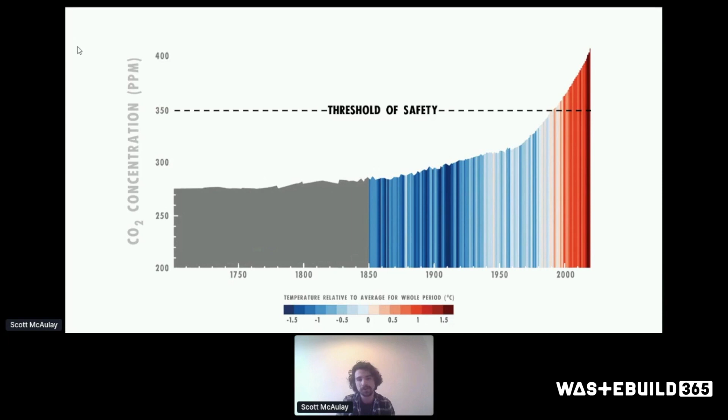We're at between 1.1 to 1.2-ish, depending on data set, temperature rise already. With that 1.5 degree threshold that the IPCC laid out in October 2018, we were told that the difference in impacts between 1.5 and 2 degrees of temperature rise were exponentially worse. But quite shockingly, this didn't come into my architectural education, and it wasn't really spoken about in practice a great deal. The conversation has thankfully moved along, thanks to people like Maria and Duncan kicking it, but it's taken a while to catch up.

We've got these different pathways, and achieving them does involve the built environment to an incredible degree. Business as usual is going to lead to at least 3 to 4 degrees of temperature rise. And seeing what's already happening at below 1.5, that's going to be exponentially worse.

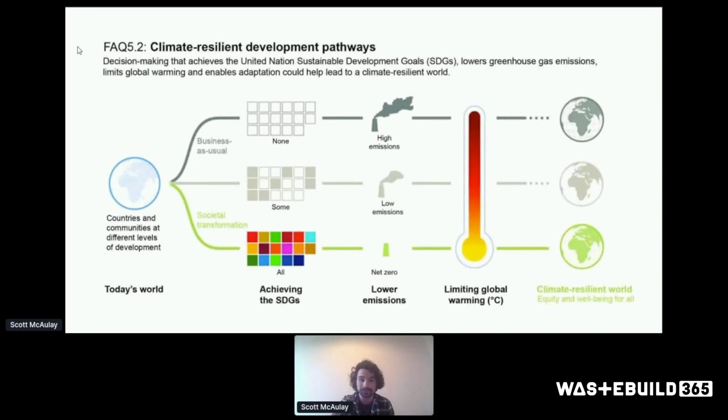The IPCC report actually specified what we need to do in construction. All pathways consistent with a below 1.5 degree temperature rise require that all building emissions be reduced by at least 80 to 90% by 2050. That's the least we need to do. Construction needs to be fossil fuel free and near zero energy by 2020 — that's right now. And there's a need for an increased rate of energy refurbishment to at least 5% per annum as well.

So we've been given the numbers, the IPCC has laid them out. The really important thing to remember is that 39% of all carbon emissions in the world at the moment are related to construction. 28% of them are operational energy and 11% are embodied carbon.

So everyone involved in architecture, design, construction has the ability to impact and reduce that 39% number. Other numbers to remember: 85% of buildings that shall be in use in 2050 are standing right now, and it saves about 55 to 75% of carbon emissions to retrofit a building instead of demolishing it. That's just some baseline figures.

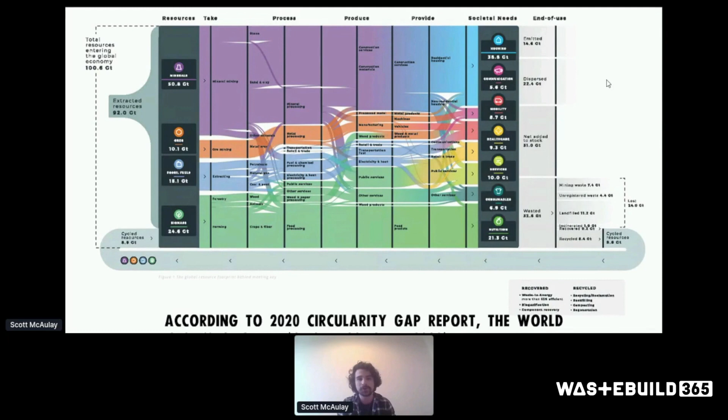On the topic of circularity, according to the most recent circularity gap report, the planet's economy is only 8.6% circular. So we've got this huge gap to start addressing. It's great where we are, but hopefully as this conversation becomes more mainstreamed into education and construction, that can be catalyzed to be a lot faster.

Another important part about the relationship between construction and the IPCC report is that we were given a planetary budget for a 67% chance of staying below 1.5 degrees of warming, and that was 420 gigatons in 2018. Very importantly, we emit at the moment between 52 to 55 gigatons every year, so unless we reduce that incredibly fast, we're going to overshoot within 8 years.

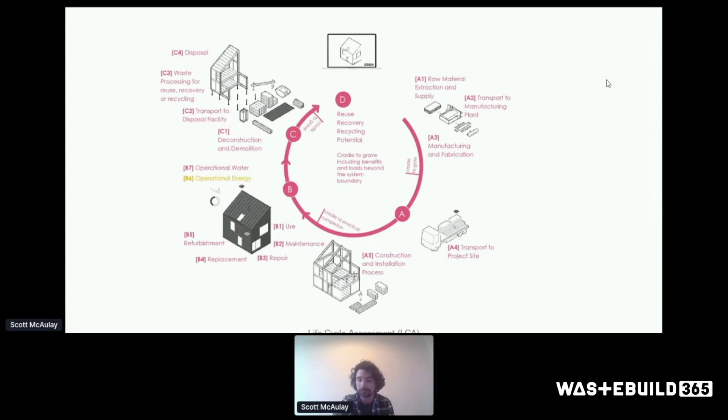This graphic by LETI beautifully illustrates all the points in a building's construction, use, maintenance, and deconstruction where carbon's emitted, because our typical life cycle, the long lifespan, has traditionally been seen as about 65 years, which in the case of a climate emergency is far too short for buildings to be doing. We need to push that as far as possible, have a capacity for transforming buildings and changing their use, not simply knocking them down when their use goes away.

The next bit of information is about that kind of injustice and looking at where we are in terms of the planetary conversation. If you look at the numbers, the global north is responsible for 92% of historical emissions, and the global south, who proportionally have the majority of the impacts, are only responsible for 8%. This was published last month in The Lancet.

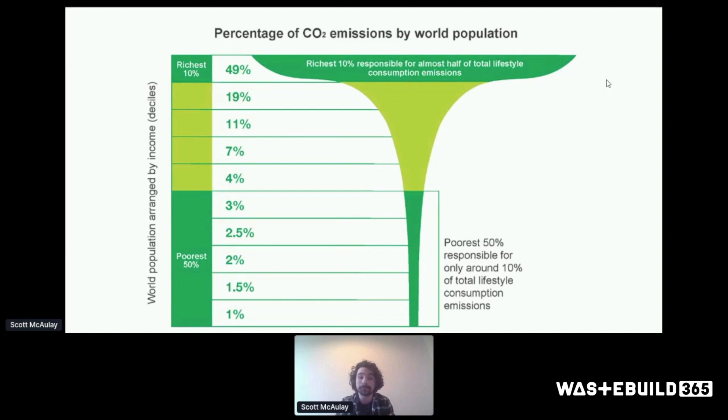When you start to look at emissions by world population, even though it's not all about carbon, the richest 10% of people on the planet are responsible for 49% of total lifestyle consumption emissions, and the poorest 50% are responsible for around 10%. And again, 100 companies are responsible for 70% of all greenhouse gas emissions since the 1980s.

As Naomi Klein summed up concisely in her last book, for the past three decades, since the IPCC was created, since the first report was published 30 years ago yesterday, the refusal to lower emissions has been accompanied with a full awareness of the dangers. This kind of recklessness would not be possible without institutional racism, even if that's only latent.

So we now know the economic arguments as well. Since 2006, we've known that climate change could have been curbed by about 1% of global GDP, but to leave it unchecked would be about 20% of the then damage. The recent report that came out this month was that it would cost 0.5% of global GDP to reach net zero by 2050. So the numbers are actually, we know what they are, we know what we're working with.

One huge problem is public awareness on what net zero means, what it means to get there, what has to change. A recent study in the UK showed that 64% of people surveyed had never heard of net zero before. So in construction, we've got this huge part to play in the conversation of making that public knowledge.

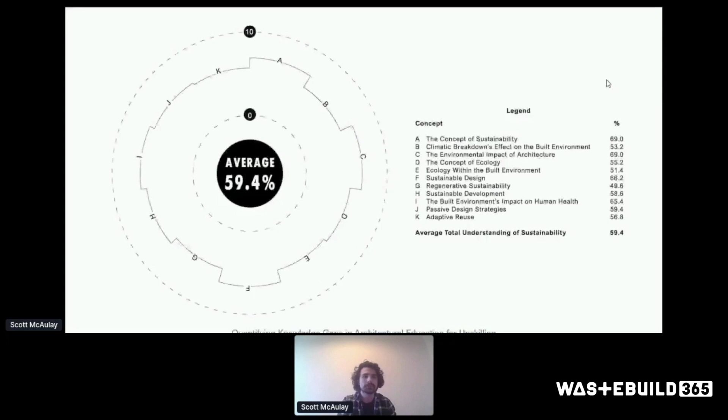This means recognizing that practitioners coming into the profession are feeling the mental and emotional side of climate change as much or more than you're feeling it yourself. So in workshops now I've taken to giving people space to share this, as it's something we haven't been doing before. In a workshop with landscape architects, I asked a room of 100 people who'd ever spoken about how they felt about climate change, and we got 6 hands very tentatively raised out of 100.

To hammer that point home one more time: 39% of all carbon emissions on the planet are to do with construction. So we've got this huge potential space to do incredibly good things in. If we can embed climate literacy into our conversations and how we engage with clients and institutions, we can affect more of a cultural shift in that direction.

So I'll wrap up because I think I've almost hit my time limit. One of my favorite quotes of all time is that the role of the artist is to make the revolution irresistible. Architects are not entirely artists, but our role is illustrating what the future could look like. So I'll leave on the pitch that the role of the architect is now to make decarbonisation irresistible—to paint a picture of the future that makes this something people really, really want, and entirely irresistible as well.

And I'll wrap up before I hit my time limit as well. So I think I'm done.

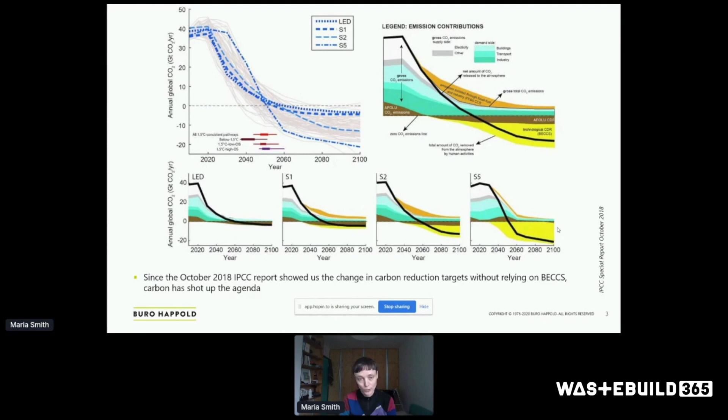And then over the roughly 20 years between the late 90s and the 2018 report, during which technologies like BECCS were explored in more detail, it became clear that dream, that hope, wasn't going to come forward at anywhere near the scale and speed we had previously expected. So suddenly we had to remodel everything without that level of capture and sequestration, and actually look really hard at the cuts we needed to make.

One of the key reasons we didn't make that decision earlier, and the reason we were so seduced by carbon capture technologies, is that we—I'm talking about the big collective we here—were looking at the close correlation between material footprint, carbon dioxide emissions, and global GDP.

We were very scared that if we try to make sudden cuts to carbon dioxide emissions, that's going to have a huge economic impact. There's always this trade-off being talked about, and we hear it every second sentence at the moment in terms of dealing with COVID, that the economy mustn't be harmed in any way. The close relationship between carbon dioxide emissions and the economy meant we were ready to believe this technology can help us maintain the economic status quo. And the fact that we were so allured by that technology has now put us in dire straits.

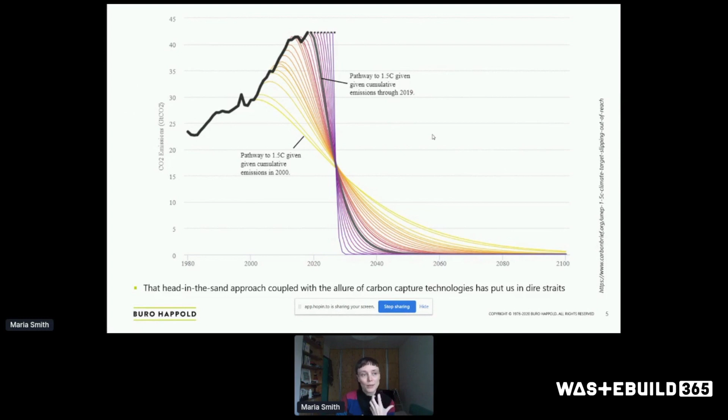I'm sure everybody's already seen this graph, but it bears repeating to look at how much more gentle the transition could have been if we'd started sooner. I say this not to depress us all, but to remember that we need to be looking ahead, and we need to not make the same mistake with biodiversity collapse as we made with carbon.

I'm so pleased that the awareness and projects like Scott's are really changing the level of literacy around carbon at the moment, but we also have to talk about biodiversity and ecosystems as well, because they are critical and in critical condition.

We are deeply, deeply reliant on ecosystem services, which is a horrible way to put it, but it says something from that human-centric point of view. The reality is that we're living in a very networked ecosystem, and human health is bound up in all of these other systems being successful and working. We don't even fully understand the way that if we fiddle with something over there, how it's going to affect these systems. So it's really important that we appreciate there is a complex ecosystem that we're part of, that we have to not mess up.

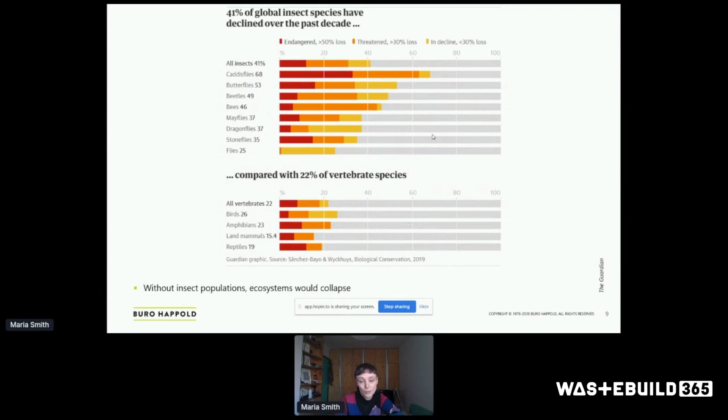The point I'm trying to make is that we have to not stick our head in the sand about this stuff as we have about carbon. This is true for us in the built environment as well, and I would like to make sure that as we talk more about carbon, we are talking about the other impacts that the built environment is making alongside all of these things.

I've made a quick list, but I think the first most important thing is that we don't understand this as the built environment versus the natural environment, with the best thing we can do for nature being to put a big keep-out sign on it and make sure the built environment stays over there, leaving some nature left for nature.

I think that's a flawed understanding, and it also lacks imagination. It lacks us being able to envisage a future where we can have a positive and reciprocal relationship between humans and the rest of nature. That's a really important starting point, that we're part of this ecosystem, and we need to respectfully and carefully lock into these cycles, not think of ourselves as separate, or that the best thing to do is to be separated.

So this is just a list of slides that I'm going through quickly because of time limits, about the ways in which the built environment and our professions encroach on and damage ecosystems.

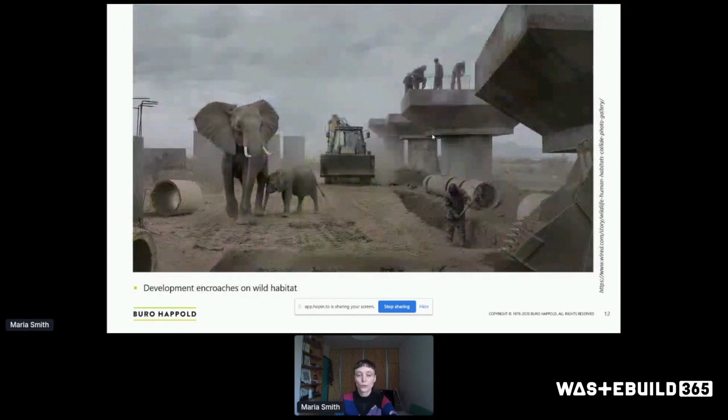There's a first list of the more direct ones. We obviously encroach on wild habitat, quite literally curtailing habitats that wild animals live on. This is true in a very shocking sense, but it's also true in lots of little ways, such as when we redevelop even brownfield sites, causing immediate species loss, biodiversity loss, and habitat loss in a direct, obvious way.

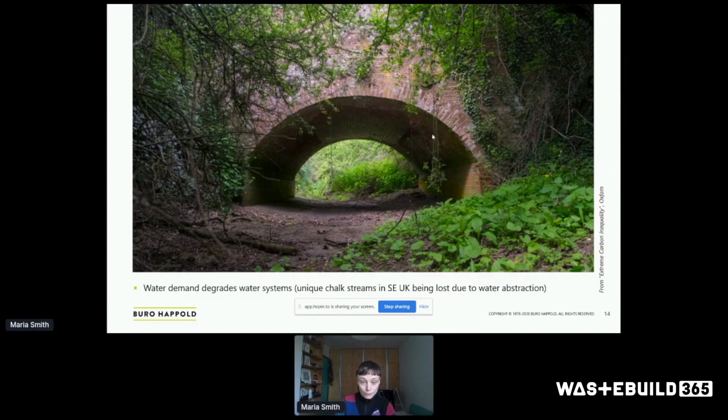We degrade water systems through creating unsustainable water demand in locations that can't service it. There's a really sad series of streams completely unique in the south-east UK and northern France—habitats unique in the world—that are being dried out and lost forever because of water demand, for example.

And there's obviously water pollution—a very clear one, that we cause water pollution and air pollution through our built environment activities. There's also the heat island effect that we all feel as those of us living in cities, but it's going to be so much more keenly felt as temperatures continue to rise.

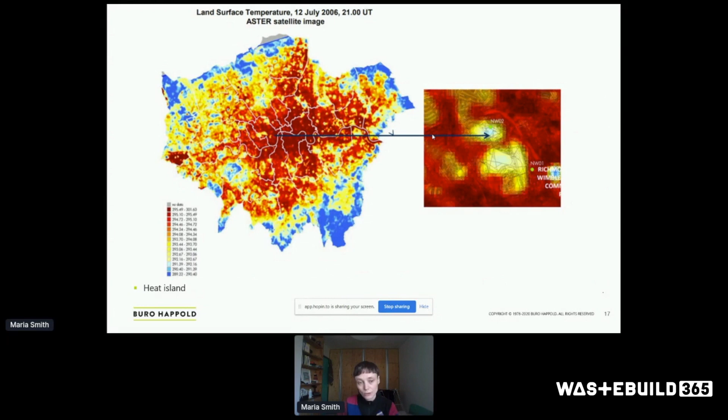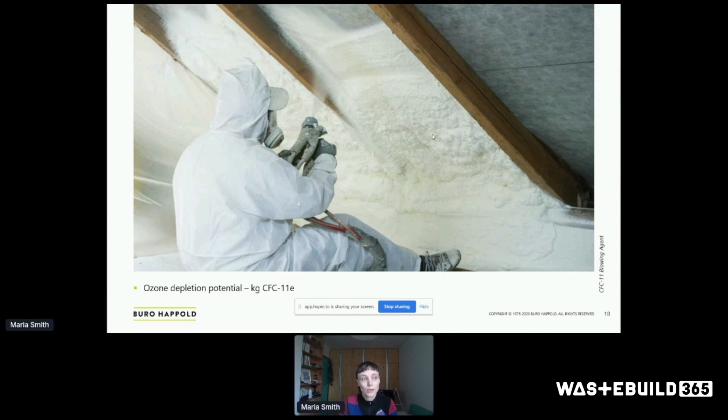On top of those more immediate effects that happen almost within the site boundary, there are also effects we're causing elsewhere—similar to how embodied carbon comes from demand created within the site boundary. Things like ozone depletion—we have to not forget about this. We felt like we did a lot about it in the 80s and 90s, but it's still a problem, especially when dealing with waste building materials and waste white goods.

Acidification—of acid rain, air, water, and soil. This is still a huge issue, often associated more with other industrial processes, but things like steel are a significant contributor through nitrogen oxides and sulfur dioxide emitted into the air, causing direct forest dieback and so on. So we in the built environment industry are contributing to this as well.

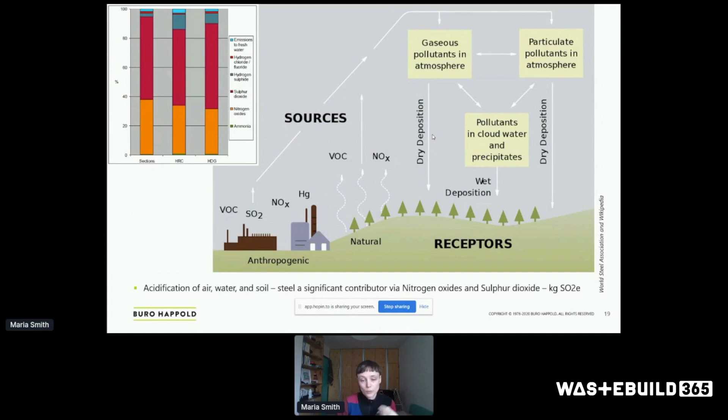Another water one is eutrophication—excess nutrients triggering rapid algae growth that disrupts ecosystems. The sun isn't able to get beyond the algae into deeper waters, creating deoxygenated dead zones, and the algae can become toxic, causing red tides and so on.

This is more associated with unsustainable agriculture, intensive farming, and fertilizer runoff, but products like concrete manufacture also directly contribute to eutrophication. So again, we in the built environment are causing these kinds of problems.

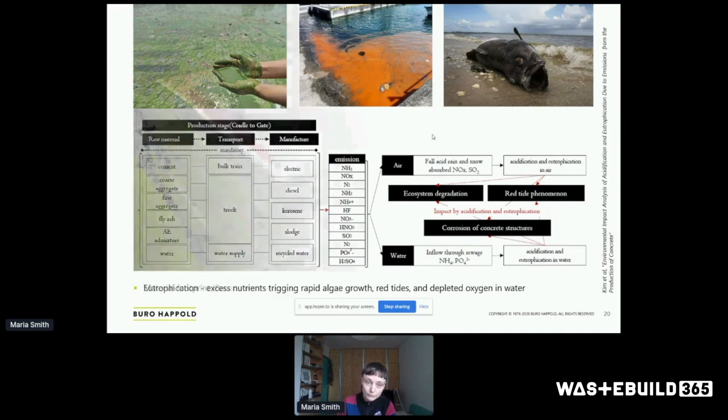Then there's our material footprint—something Duncan talks about a lot in terms of moving towards a circular economy and reducing our overall material footprint. It's not enough to reduce the embodied carbon of our materials; we have to reduce the actual use of these materials. It's not just about avoiding waste, but avoiding extraction in the first place, because if we continue creating demand for more and more materials, the effects on the landscape are really severe.

This is one of many examples showing that kind of direct scarring. This is red mud, a very alkaline byproduct of the aluminium industry that has to be kept separate from our other ecosystems. But there are problems and leaks, and ways this isn't always handled super well—a striking example of how extractive architecture affects the landscape.

So there are many different problems, all interconnected in the way the ecosystem is interconnected. We need to take a systems approach to untangle this and fit ourselves and our habitat creation into these systems. This is a crude diagram I've drawn, just trying to tie together some of what we're talking about.

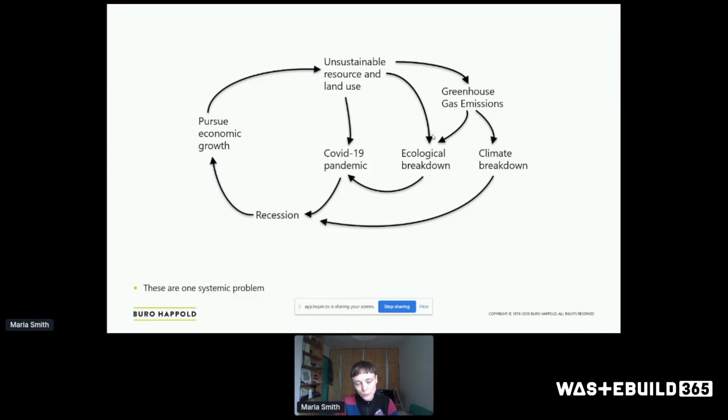So I think we're all quite familiar now, and we agree that it is unsustainable resource use and land use that is causing greenhouse gas emissions, that is causing climate breakdown and ecological breakdown. This is something that is happening. Thankfully, at least, a lot of climate denialism has been refuted now, and the misinformation is much less. It's still some of a problem, but by and large we are now living in a world where this is acknowledged. So this is good.

The COVID-19 pandemic is part of this, and I think at the beginning of the pandemic that was maybe something that was a little bit more fringe, but there have been lots of studies and articles reporting on this now.

It's really important, I think, to understand that the pandemic is not a competing interest for climate breakdown or ecological breakdown, because it is part of it. It's part of the same human-made, unsustainable behaviours and activities that have put pressures on our ecosystems to cause that.

So just to be really clear about how that happens: our demand for resources has caused and incentivized the invasion of wild landscapes. This has degraded ecosystems and caused habitat loss. This habitat loss means species are forced into smaller spaces, forced into new interactions that they haven't necessarily been used to, and this creates a literally breeding ground, a really ripe environment for pathogens to jump from species to species, including humans.

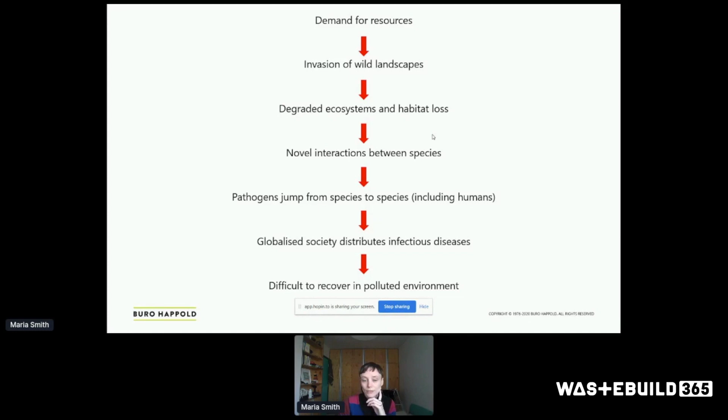And of course, our globalized society has distributed infectious diseases very well, and the real kicker in a way is that it's really difficult to recover in this polluted environment. So I think it's really important that we recognize the pandemic as one of these things.

And while that's sort of terrifying in some ways, maybe there can be a positive of this, that it can maybe incite some action, incite some change. We've seen so much that change is possible. We've seen communities fight back, but we've also seen incredible health inequalities laid bare by this pandemic. So I think it's a really difficult thing to talk about, but I think it's important that we bring it into this conversation when we're talking about ecological breakdown.

And we see already immediately, the pandemic is causing a recession, and as Scott also mentioned, the climate and ecological crises also cause economic harm and cause recession, and the longer that we leave it, the greater that harm is.

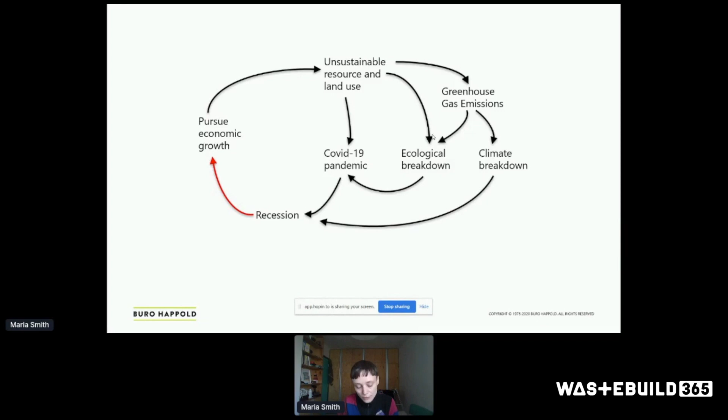But this is where things start to become a little bit problematic, because then we end up in this position of economic instability, of recession, of those kinds of economic problems. And so we try to grow our way out of it, to pursue that economic growth in order to rebuild, build back better, and all of those kinds of slogans that we hear.

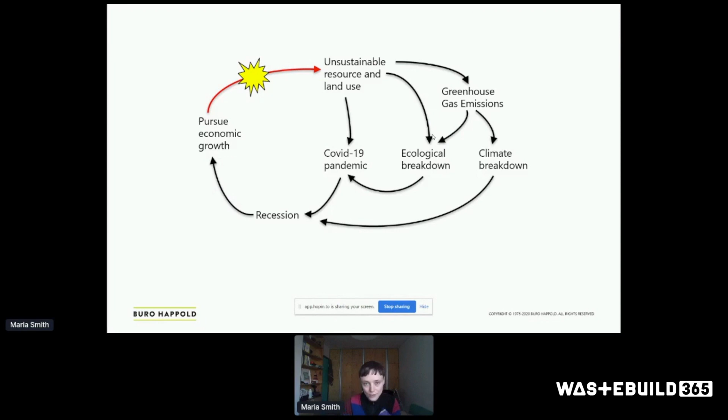And what I kind of want to scream into my pillow about at night is that by doing that, all we're doing is redoubling down on exactly the same negative... it's a positive feedback loop, but it's a negative thing that is causing these problems again. We have to appreciate that if we just try to grow ourselves out of this problem, all we're doing is further incentivizing this unsustainable resource use and land use, and we're just doubling down on this problem. So we have to look at this.

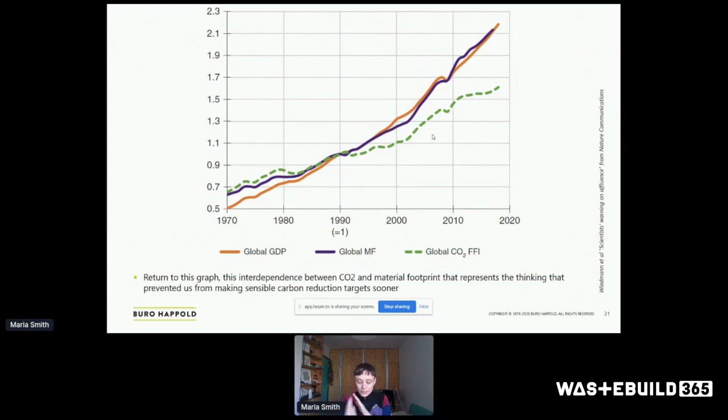So I just want to dig into this a little bit right now. As I'm saying, the pursuit of economic growth is driving this ecological damage. So going back to that slide from the beginning, we can see that previously the argument was these things are really closely linked together, so we can't suddenly reduce our carbon dioxide emissions because we're going to harm the economy. And yet now we're saying it's a problem that these things are really, really linked together, because we want to be able to grow ourselves out of this recession and so on.

So let's try to reverse this arrow by saying we don't actually have to have these things linked together. Now, this is just a sort of wish. There is no actual plan as to how we can do this, and no evidence that this is in fact possible. In fact, this has been used very strongly the other way around, as evidence that we can't suddenly make changes because economic damage will happen.

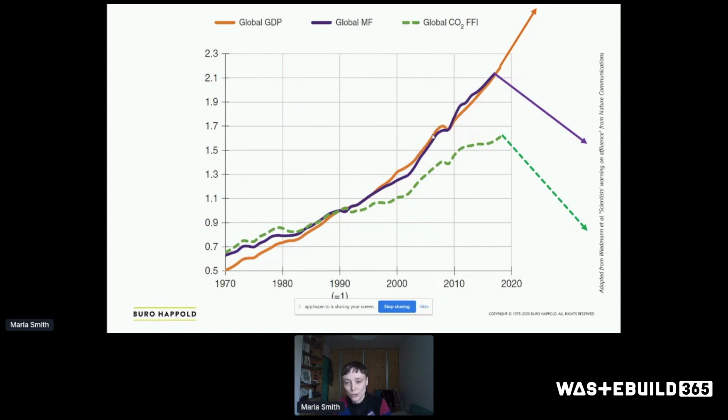The economy is not dematerializing, it's rematerializing. Even though over the last decades, whether you take a specific country or the whole global economy, the amount that has become tertiary sector, services, or weightless - like the internet - gives the impression that perhaps this is happening. It's not. Our material footprint has continued to grow despite that.

But still there's this idea like, oh, it's going to be fine, technology is going to come along. This is the exact same problem as we were talking about with carbon capture and sequestration - this idea that technology is going to save us.

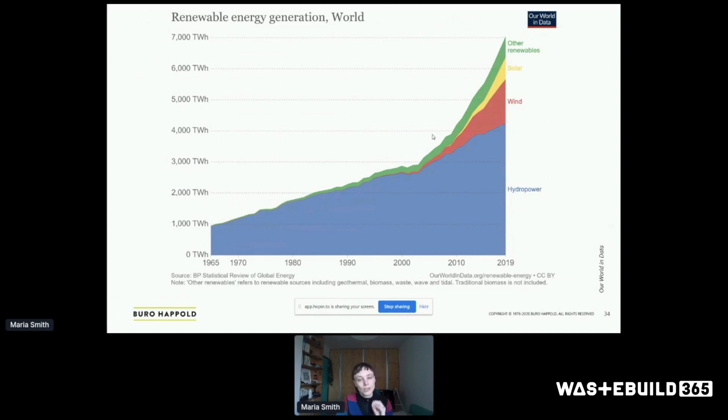But the problem is, if we continue to pursue that economic growth, the overall energy use - total energy use and production from all sources - is also going up massively. And the goal we're currently setting for renewable energy production is not only to meet our current energy needs, but actually to grow at such a supreme pace.

Just to make the point as to how big a jump this has to make, these are those two graphs at the same scale. It's tiny. Our renewable energy budget at the moment is about 5% of our total energy use - about the same amount of energy we globally had in 1850.

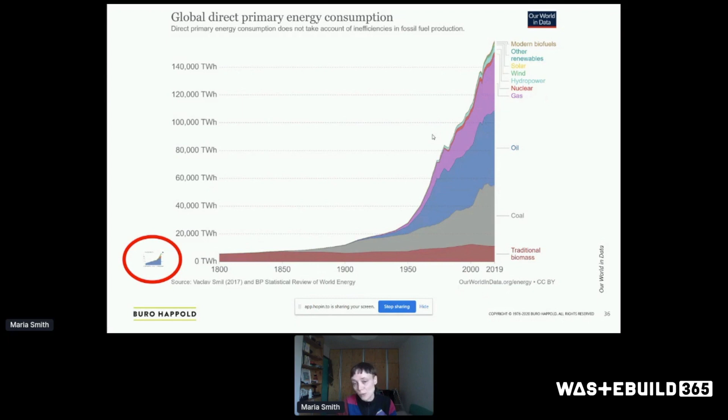If we're going to make 100% of the energy we use renewable, which is what we need to do, we need not only to massively scale up renewable energy use, we need to use less energy. We need to meet in the middle - we can't just expect that energy use to go up. That means we have to stop growing the economy and stop requiring more materials, more energy, more production, more everything. We can't just have more. This is the point.

At the moment there's this idea that it's fine that we keep making things worse, because at some point we're going to reach a tipping point and suddenly start to make things better. There's just no evidence that that is possible.

It's just mad. The evidence you'll sometimes see, like from UK government data, showing that we are starting to improve things - all that's doing is fiddling the books. It's just taking off our impacts because we've moved a lot of our industry offshore, taking all of that off the books. That's the only way they can make it stack up like that.

If you actually look at what we consume, this is why I'm so excited about the way we're talking about embodied carbon, and why I'd like us to talk about embodied everything else - embodied water, embodied energy, embodied materials, material footprint, embodied noise, embodied social value - because that way of thinking about embodied impacts means we can't just take our impacts off the books if they don't happen within our boundaries, and we continue to take responsibility for that.

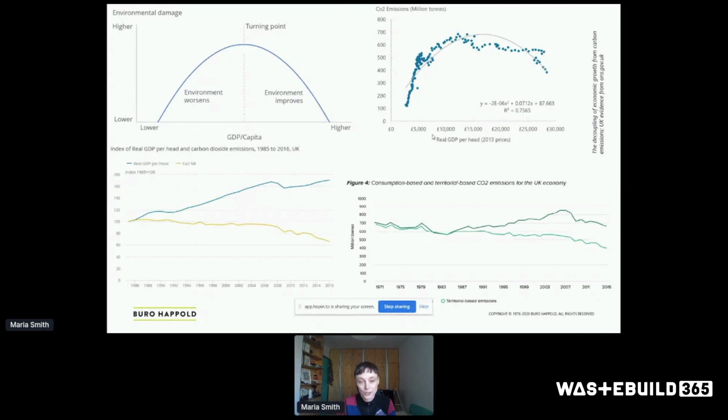So that's really good. But the point is, we can't keep increasing energy demand and resource use. We have to acknowledge that growth is driving this, and instead we need to find an alternative way to equitably distribute our scarce resources and find alternative economic systems.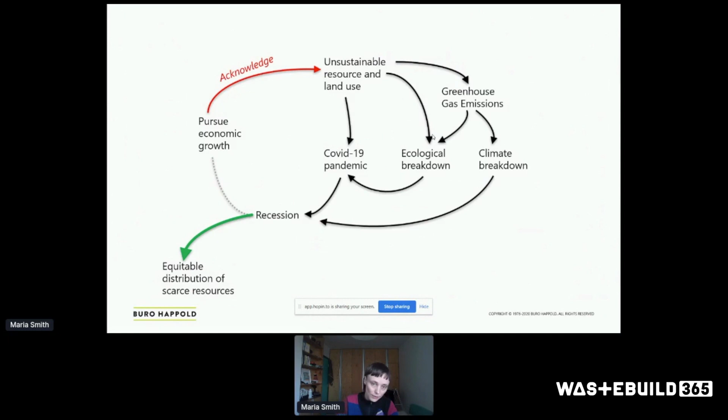I'm just going to flash some up for you to Google later in case you're not familiar with them, but there are new economic systems and ideas coming out, things like sovereign money, which takes the power to create money away from banks and gives it to democratically elected bodies such as governments, so they can create money and control the economy more closely.

There's also modern monetary theory, which understands tax not as something needed to fund public spending - that's a fallacy - but rather that taxes are about controlling inflation and the distribution of resources. If money is a construct, then money can be used in a much more careful way.

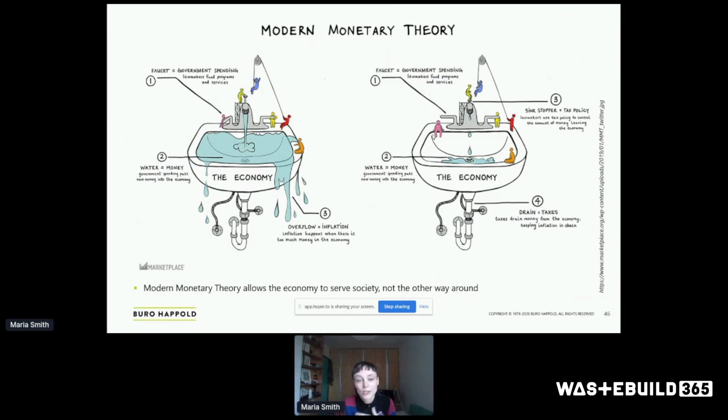These kinds of economic theories allow us to escape the dependency on ever increasing growth, which means we can actually tackle our environmental problems. Lots of corporate reform ideas are connected to this as well.

So if sovereign money and modern monetary theory are about how governments could think differently, there are also different ideas around how corporations can think differently. For example, certified B Corps, where you consider not only your shareholders and profits, but also other stakeholders, such as your workers, the community you impact, and the environment.

There are policies such as rent controls or limits on advertising. I think we will look back on some of the advertising we see now, and it will be as shocking as things we look at today, when we talk about the incredibly environmentally damaging and high carbon goods that are still being advertised and driven forward now.

Then there's lots of fantastic things to do with universal basic income, care incomes, and training incomes, that can help, in concert with these other economic policies and changes centrally, to support us and equitably distribute resources.

This kind of stuff will allow us to actually reduce working hours, scale down our harmful industries, and reduce our energy use. We'll be able to do this if we start having these kinds of economic policies, rather than staying under the current growth paradigm where we need to keep growing in order to solve other problems, like not tackling inequality head on.

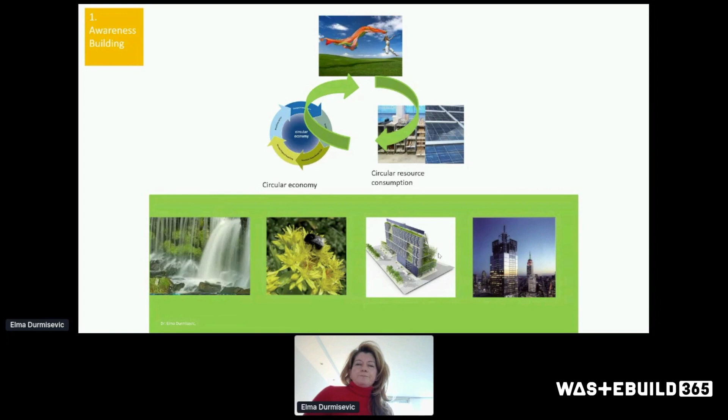But there's still a lot of work to do, especially when looking at construction. The question is, where are we now with the construction and design of our buildings? How far are we from the ambition of eliminating waste in construction and creating buildings and built environments that merge with the natural environment, providing positive rather than negative impacts on the natural habitat we have as people on this planet?

Looking at the construction industry, buildings are built in a way that when we want to change something, the only way we can do it is by demolishing. They are demolished all the time, mainly due to degradation of materials, new technologies, better isolation standards, inability to accommodate different user needs, no transformation capacity in the buildings we design, and inability to exchange building components and materials.

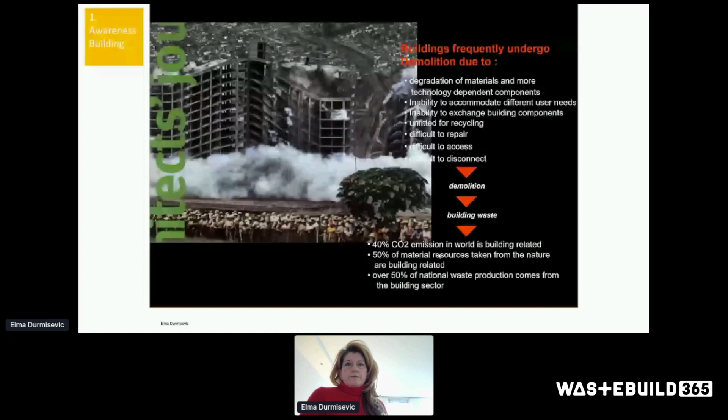The fact we deal with today is that the construction industry worldwide is one of the key industries that will play an important role in fighting climate change and our path toward a circular economy, despite its very negative impacts: 40% of CO2 emissions related to this industry, 50% of material resources going into it, and 50% of national waste production related to it. So this is the environment we are dealing with.

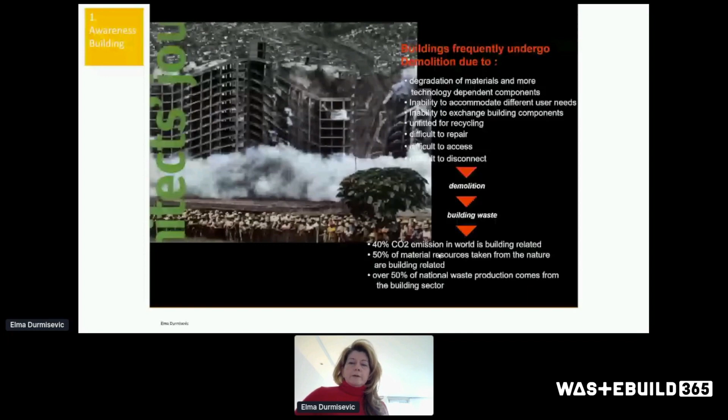As I mentioned, as a designer and a scientist, I'm trying to understand where things go wrong and how we can fix it.

This is my last slide on the awareness building story, but it presents very much our attitude to construction and how we value construction. We see this kind of demolition scene in our cities all the time.

I live in Amsterdam, and this is a project I followed because it's nearby: the Fortis Bank in the city center, which was 16 years old, with a granite facade like the one you can still see on the Cheops Pyramid in Cairo, which has stood for 3,000 years. This building was crushed into pieces after 16 years and became maybe part of the sub-construction for a road.

in the Netherlands. So a building which was there in the city center lost its use value and material value within 16 years and gave way to new construction, which has been built in the same way and probably will be demolished too, if you look at the trends from 25 years ago.

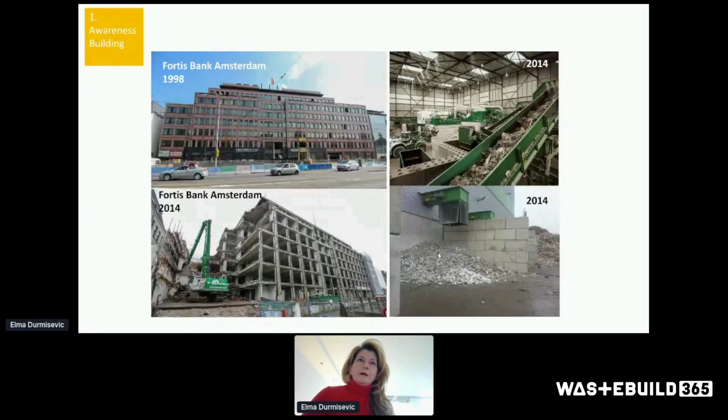The problem I see in construction and design is that we perceive buildings as static products, static structures which do not change, while the core question that architecture and building has to answer is to provide shelter to human activities and human life. And that core need, the human activities and life, is very dynamic. So obviously there is a fundamental fault in the way we approach design and construction in general, building kinds of pyramids around something which changes so often.

This slide indicates how dynamic our own lives are. We go through 7 phases in our life, and every phase requires something else from our built environment. In the Netherlands, people move almost every 7 years from one house to another because the house itself cannot accommodate the requirements of the next life cycle.

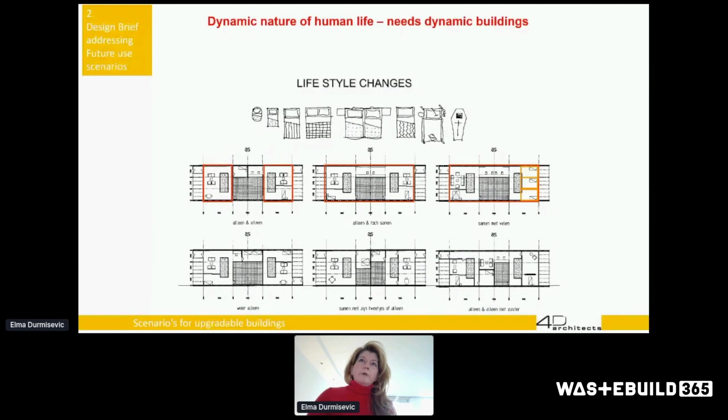That's the kind of crash that happens when we look at the buildings we inherited, that we built and even design today, which are not built to be adapted, transformed, or upgraded to something else. Their parts are not designed to be recovered, updated, or upgraded with new technologies and brought back into these buildings. We know only one thing: we design buildings for only one end of life, and that's demolition, which creates huge negative effects on the built environment in general.

So the future, as I see it, and all the tools and protocols I've developed so far, also within European projects, is developing new transformable buildings, an upgradable built environment which does not recognize demolition as a process at all, but reconfiguration, reconstruction, transformation, and so forth, so that a building can live, change, and adapt through its whole life cycle without being demolished, but upgraded.

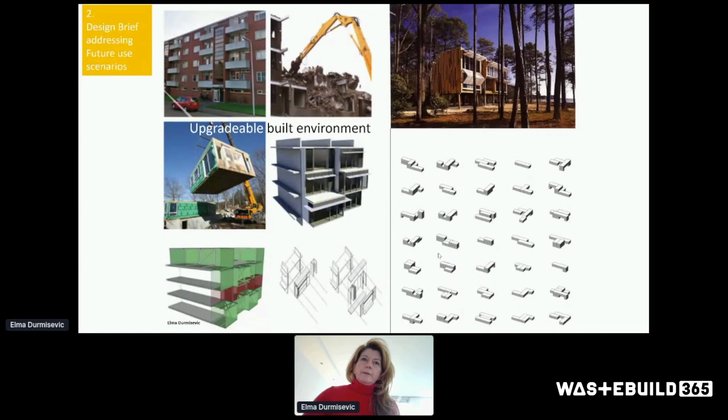So where do we start if we want to approach the building in the future in such a way? If you want to design buildings which will not end in 20 years because they cannot be adapted to new user requirements, and therefore need to be demolished...

We start with understanding the question properly, and having a good discussion with the owners of future buildings. This is a project I'm showing here, done with the Housing Corporation Woonplaats in Enschede, in the eastern part of the Netherlands, which wanted to build a few housing blocks in one of the neighborhoods in Enschede.

My question at that point, as we had already raised the issue of problems with existing buildings, demolition, and all its negative effects, was to ask them to think twice before presenting their design brief and their user requirements for their houses.

I asked them also to study the demographic changes over the following 50 years and the developments of the city and neighborhood, and based on that, to sketch 4 to 5 user profiles they expect to have in these buildings over the coming 50 years. Surprisingly, the Housing Corporation took it seriously and came up with 5...

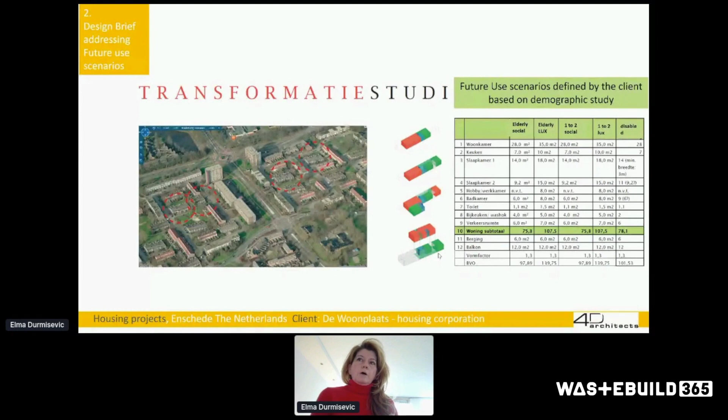of the city itself. This was input to develop a system, to design a system able to accommodate these changes from one use to another, or to a fifth, without demolishing, but allowing the block to live together with its users and future users, and to accommodate their future needs without being demolished. Already in this project, the ideas of understanding the transformation capacity of a building design, what it offers and can offer for future users, came to the table.

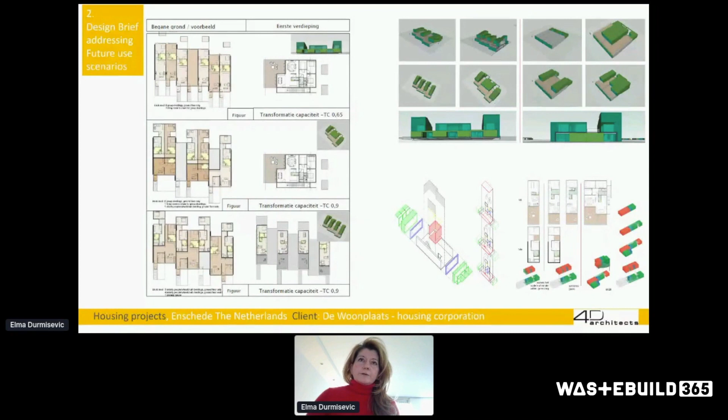A model which I developed later, also within the BAMB project, is the transformation capacity tool, which addresses this issue. I will talk about that a little bit later.

The other important thing, besides understanding future users, potential users, and user requirements, is trying not to design buildings for one use, but for multiple uses, which requires more action and responsibility from the owners of the buildings themselves.

The other one is technical requirements. Sometimes we deal with new regulations like better isolation, better materials, and so forth, and that can be a reason why we demolish buildings. So why not design building component systems and parts which are upgradable on the level of module systems and components, so that you can upgrade and reconfigure your system?

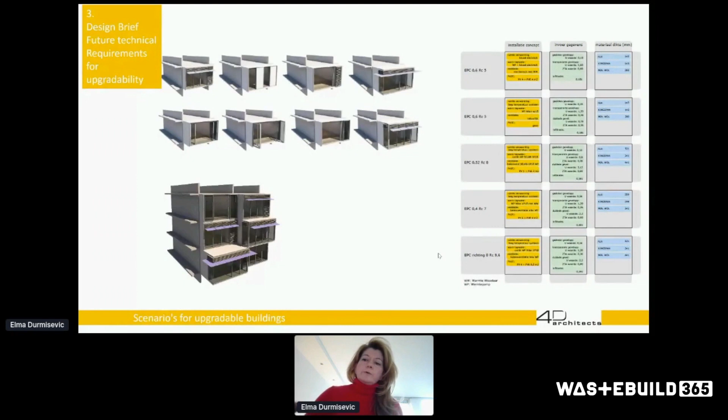This is a development we've done with a consortium of industry partners in the Netherlands, where the Housing Corporation was also involved, where you can have a variation of energy performance requirements built into the module itself, and the module can be adapted depending on its orientation - is it south or north, do you need solar panels or not, more open glass or not, or even bigger spaces. If additional changes are needed on such a module, it's brought back to the factory, the reconfiguration takes place, and the module goes back with new functionalities. That's the upgrading part of it.

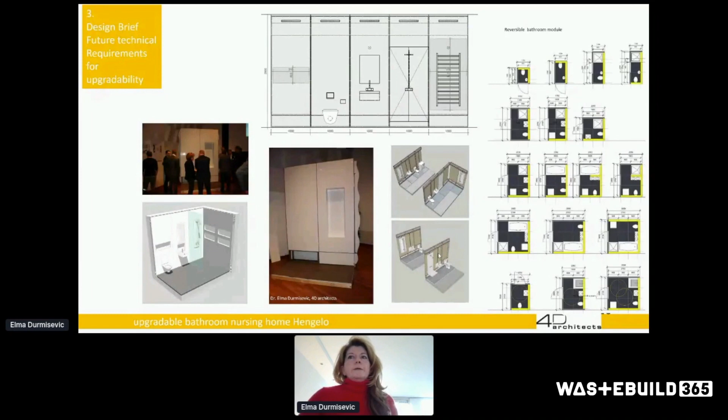I'm just showing a few other systems we've been developing with different consortiums, always with industry and one of the potential owners - in this case, the nursing home in Hengelo. This involves understanding potential patient profiles, for example in nursing homes, or the potential of transforming the nursing home into a housing typology with bathrooms, designing a bathroom system around that so it can be transformed and upgraded without being demolished.

So those are three points which I've found important over the last 10-20 years when working on building design and talking with owners and clients, but also with industry, trying to understand how we make this shift towards another way of building, another perception of what building performance is, moving away from static to dynamic structures and systems.

At this moment, we have the final code on thermal regulation, which is the zero energy building. That means this whole process, which began after the oil crisis in 1973 when building regulation focused heavily on energy, is now more or less ending and moving into the next phase, which will deal with circularity of resources and materials in a building.

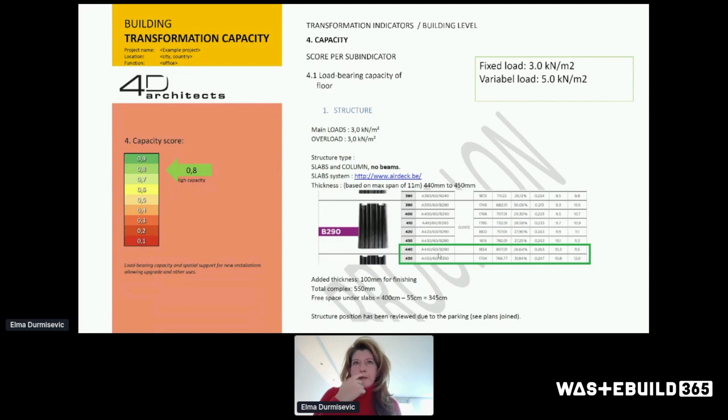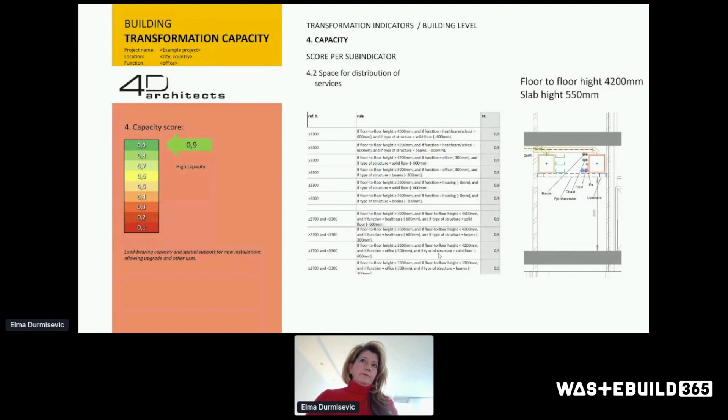That's one of the straightforward things that can extend the use options of buildings, along with the brutto floor-to-floor height - these are indicators coming from the transformation capacity tool, which I'll show in the next slides. If floor-to-ceiling height is at a minimum, like 260 now in the Netherlands for housing, and everyone sticks to that minimum, transforming it into something else that needs more installation services will cause a problem. So there are a number of issues we've recognized that can extend a building's future use if we account for them at the beginning of the design phase.

Many of these indicators I did integrate into a transformation capacity tool, which assesses the ability of a building to transform from one function to another, taking into account spatial indicators of the building, blocks and spaces, and the technical capacities within the building.

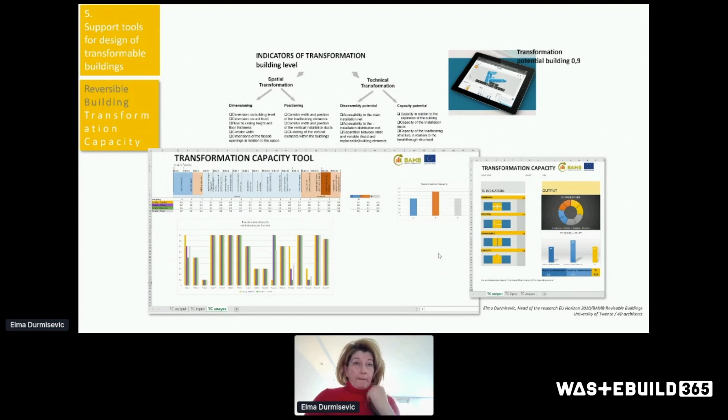This tool is also developed as part of Revit, a plugin for Revit. So designers using Revit in early design phases get direct feedback through the different design stages on the transformation capacity score, and can improve it through the design process.

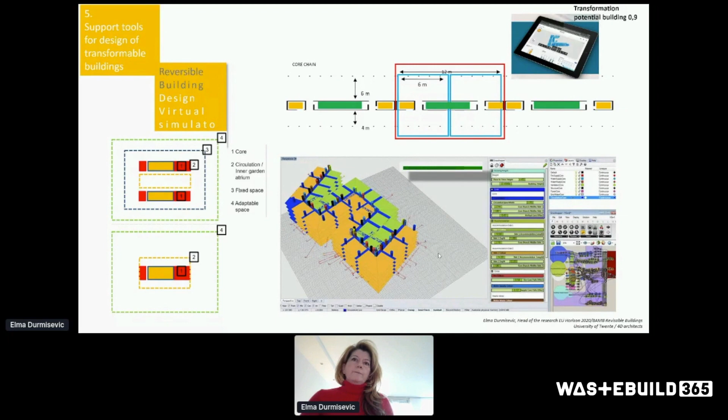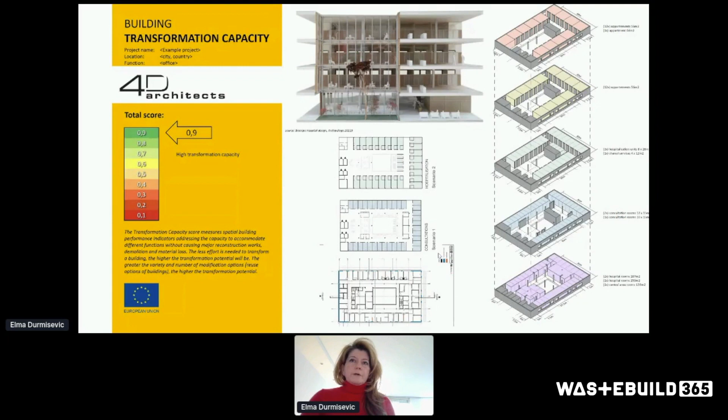Not many designers do that at the moment, which is why this tool is now being used - for example, in the new design of a new hospital in Brussels. It was used to test design solutions after two design phases, the preliminary design phase and the definitive design phase, and after these sessions and improvements with the design and engineering team of the hospital building, they increased a few aspects, resulting in an increased transformation capacity index.

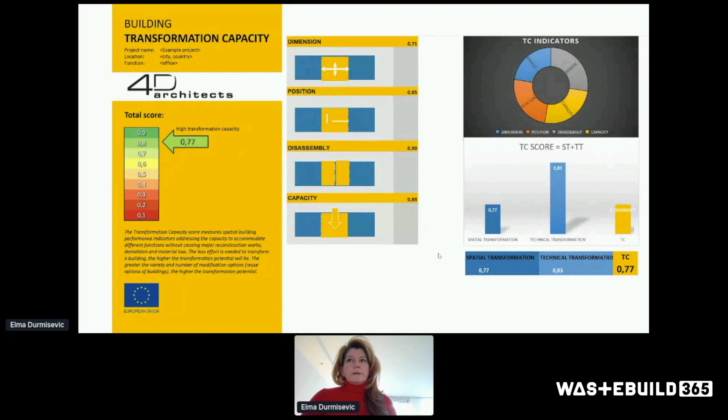That meant a score of 0.77, meaning the hospital can be transformed by partial demolition, which would not include more than 10% demolition of the structure. So these kinds of tools help us in a design process understand the impact of our design solutions on the future use and potential transformation of buildings.

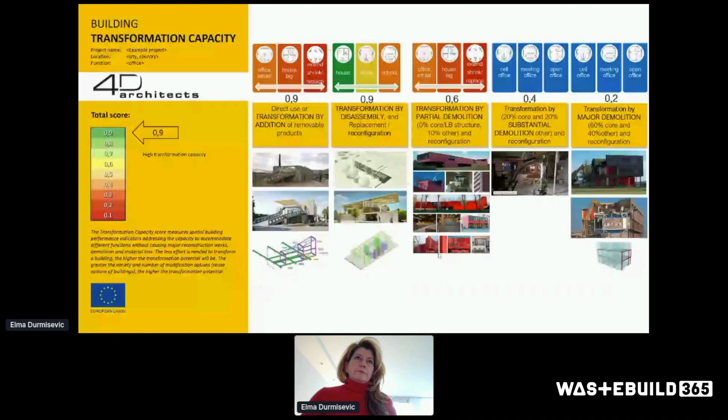Another tool I've been working on supports construction companies trying to understand how to deconstruct existing buildings in the best way and recover materials for their highest value. For that, I developed a reuse potential tool, which has been formalized within the BAMB project.

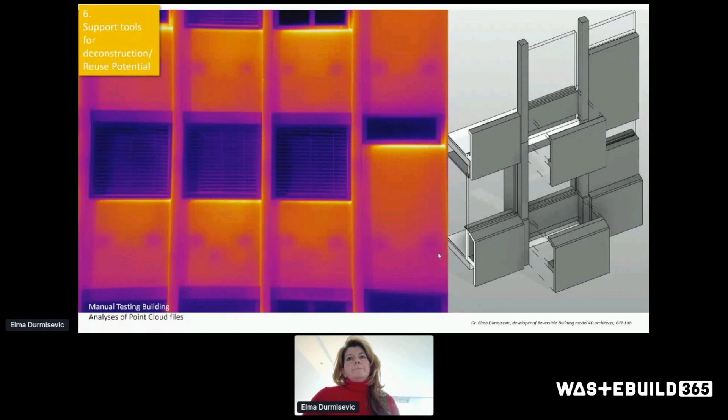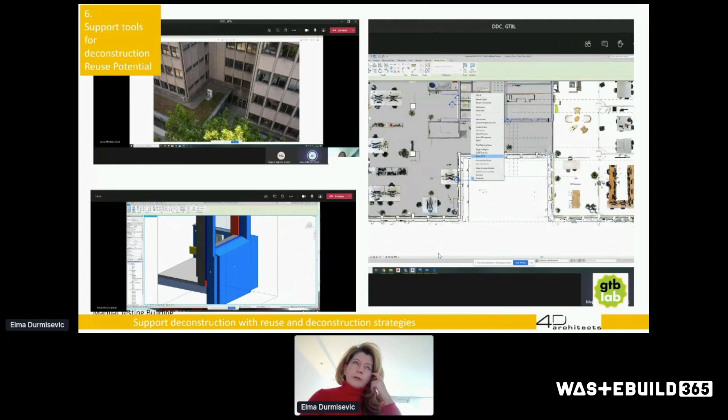Now we are integrating that tool with digitalization - we have scanned a municipality building in the Netherlands, a 10-floor high building, with infrared scans and normal scans from inside and outside, creating a basic reversible BIM, which then uses the transformation reuse potential tool to measure how easy it is to recover an element from the building without damaging the element itself or surrounding elements.

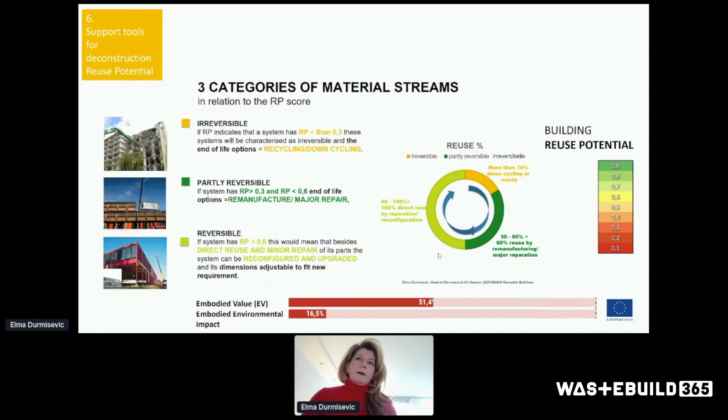That assessment is done manually on a building level, on a system level - how easy it is to take a facade system or part of the facade system out - and on a component level.

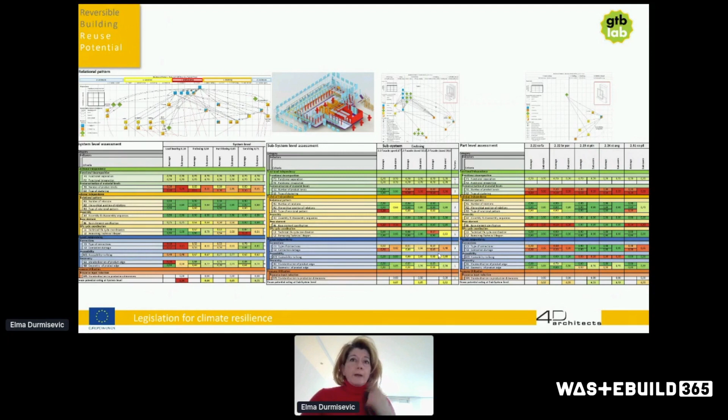These evaluations take some time, so we've integrated it with BIM, which helps us automatically create a color coding system in Revit with a plugin, indicating elements that at this stage have up to 3 relations as green, up to 7 as yellow, more than 7 as red. That's a first indication of how easy it is to take something out, and connections and other indicators from the reuse potential tool are now being integrated into that.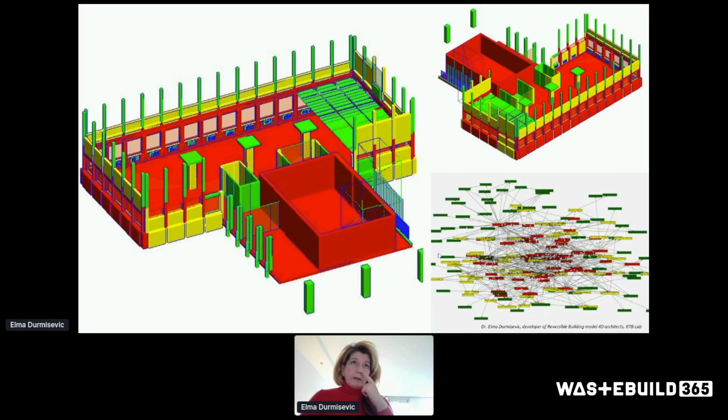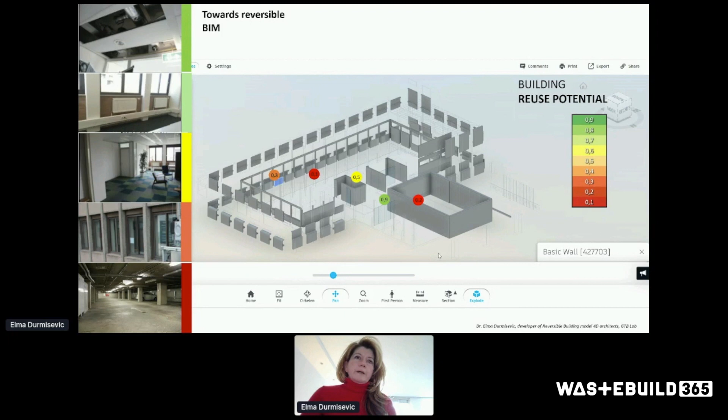This information helps construction companies understand better how to organize the construction strategy, and also what the reuse options of materials in a building are, which again helps owners of the building understand whether there is additional value that can be taken out of the existing building.

Finally, as a 7th point, I want to point out that knowledge sharing is important, and therefore we are now developing with the Ministry of Internal Affairs in the Netherlands a knowledge bank for circular buildings, where we will put in the information we came across and developed within different European projects on guidelines and protocols, measuring circularity, and number of tools.

We will also integrate realized projects and pilots in Europe, and there is an ongoing transformation lab, the GTB lab, Laboratory for Green Transformable Building, which is being transformed once a year, and all results from these transformations will be put into that knowledge bank as well.

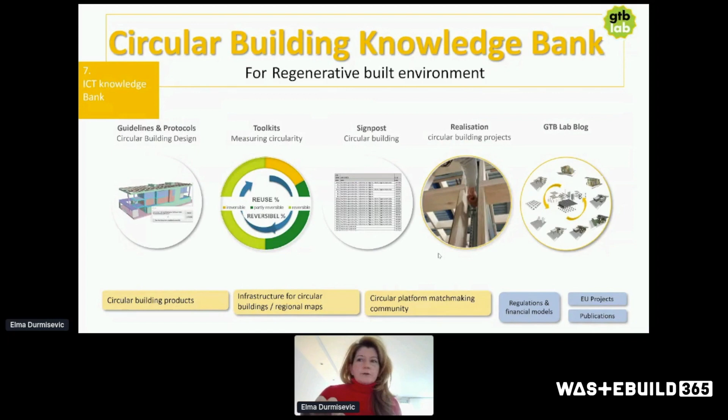So I hope I stayed within the time frame. You were fine, Elma, thank you very much. Usually an issue. No, it's been fine.

I haven't seen any questions from the audience, unless I'm missing something. I wondered if Maria and Scott could join us, if they could turn on their cameras so we can see you. Just the three of you, that was fantastic. I mean, yeah, you could have all done 45 minutes each. But I wouldn't mind asking a question of Scott first of all.

You're engaging with students and practitioners in quite a big way around these issues. I mean, who isn't scared of what you and Maria and Elma are all talking about at the moment? So, what do you think is the biggest challenge we face?

It's a bit of a corny question, perhaps, but I don't meet many people that don't understand how terrifying a lot of these statistics and issues are. I think probably one of the biggest issues is communication, because I've met people in so many other activism spaces, and the built environment's not on the radar. Greenpeace, the WWF, Friends of the Earth, they don't talk about the impacts of the built environment beyond energy, and it's really about getting that into political discussion as well, because until it's there, legislation won't change fast enough.